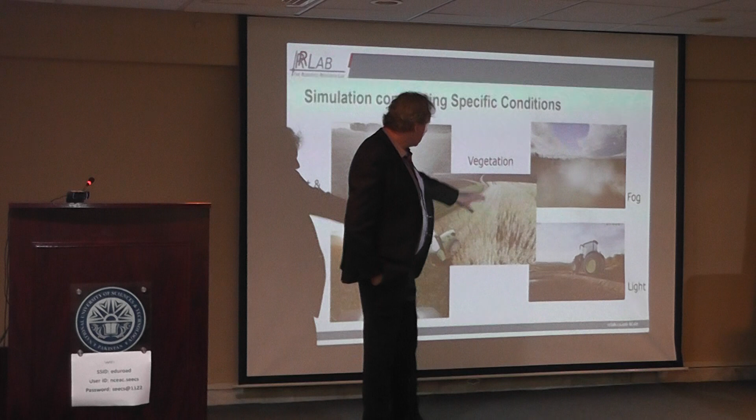And we can simulate this now. This is the nice thing. So we can say, look, what happened in the tractor? It's not moving, while the sun rises in the morning, runs around and goes down again. And you can now simulate it and find out what is really, at the end, the result of whatever you want to do in the classification process.

And we have made a remarkable test with one YOLO version. We have a camera in the best position looking ahead, and we have 4 simulated persons on the field. And we make just this test. The sun goes around, so we simulate 1,000 or even more images. And we take a standard YOLO, which is not so bad, to classify persons. And now we said count the persons in every one of these images.

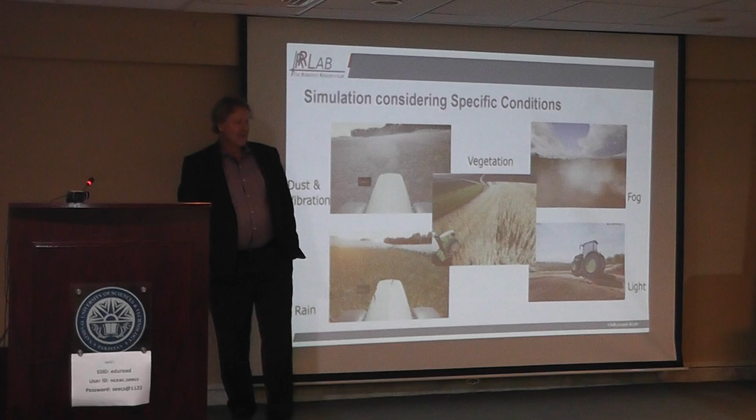What do you think came out? 4 persons were standing there in the best position. Also from some perspectives you get better results than from others, so this was all perfect. Only 50% of the time we count 4 people. We count sometimes 5 people, which also was strange. And then 2, 3, whatever. 1 also, and this comes of course based on the shadow effect. You merge this and the classifier cannot deliver what it has to do.

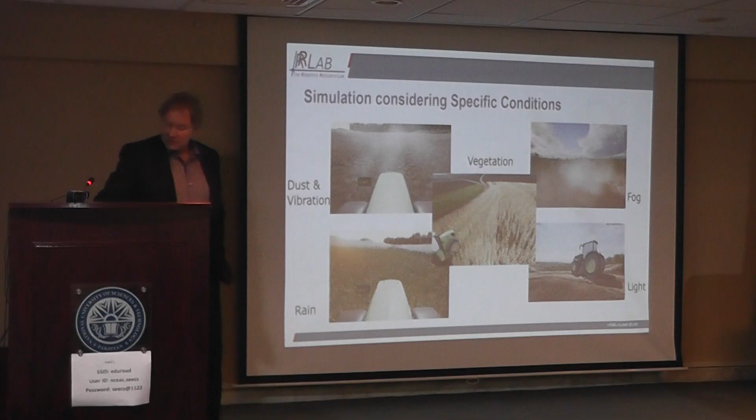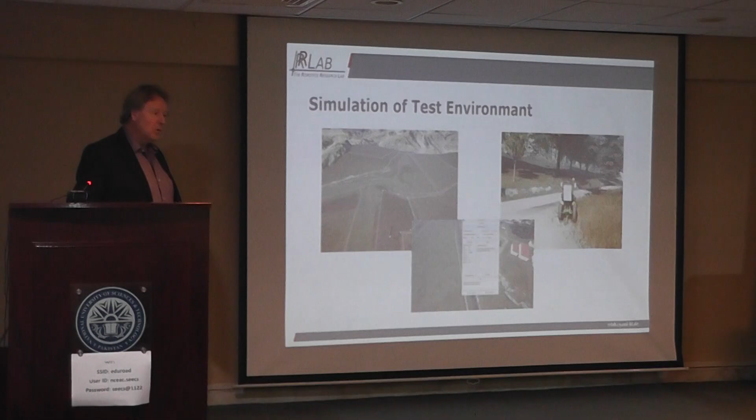So this is what we now can test. It's hard to test on a real system. How long will you go out and check your system? This is impossible. What we also use the simulation for, in an intensive way, is where to place the sensor system. This is a very hard task, because if you have a static situation, it's simple. You can place it at this angle, the camera looks down, the laser scanner should scan this, fine.

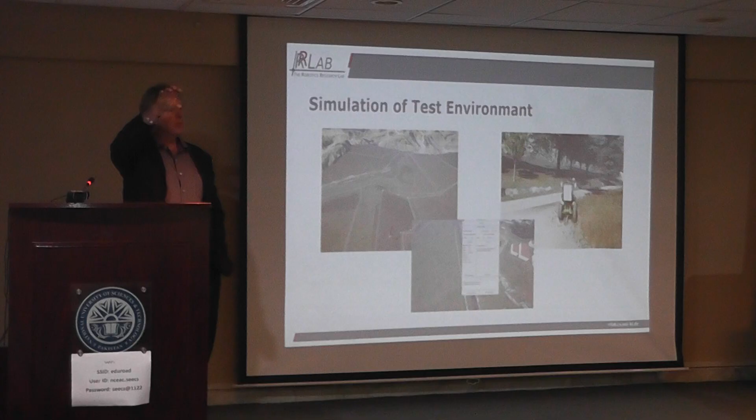But what happens if the machine is moving? And if you have rough terrain, we also have applications where the machine is really doing this, then you suddenly find out it looks to the sky, and the result we like to have is not coming. But to predict this is impossible for you. And this is helping: if we have it in the simulation, we can go over it and observe what measurement we get. And we can also find out if there is something relevant that we do not see in a specific situation, based on the position of the sensor. This is also what we now can do.

We have developed a Finroc middleware. It's similar to ROS2, for those who know this a little bit, which supports more or less that you see whatever information is going from module to module. You have a lot of interfaces to sensors, you have the drivers and all these things. You have a nice interface where you can show every camera image and whatever. If you like to use it, you have a widget, you open it and you connect it in a graphical way and you see more or less the results for testing.

This is perfect. Then for the control software, we have this reaction architecture. And the reaction architecture is more or less described here. It has the typical control structure that we have on nearly every robot. We normally have three parts. This is one on one side. You can group together the information that you get over the sensor system and the knowledge that we put into the system, the knowledge-based system.

Then of course you have user interfaces, and you have the control part, the red part here, which really controls the machine. The control in mobile robots is normally a three-layered hierarchical control, which we have also implemented here in the system with navigator, pilot, and low-level control loops. This is more or less what we do.

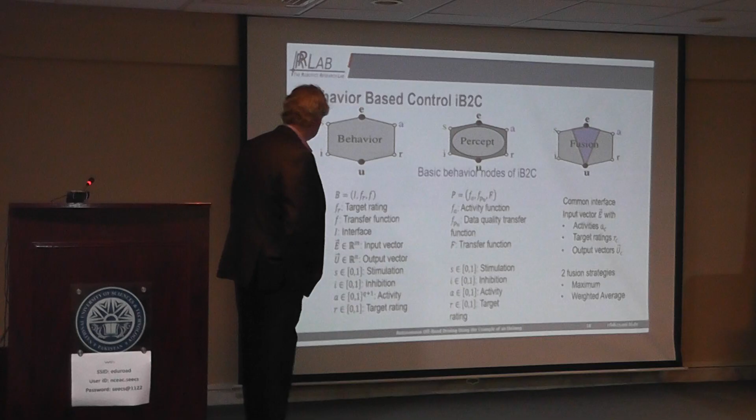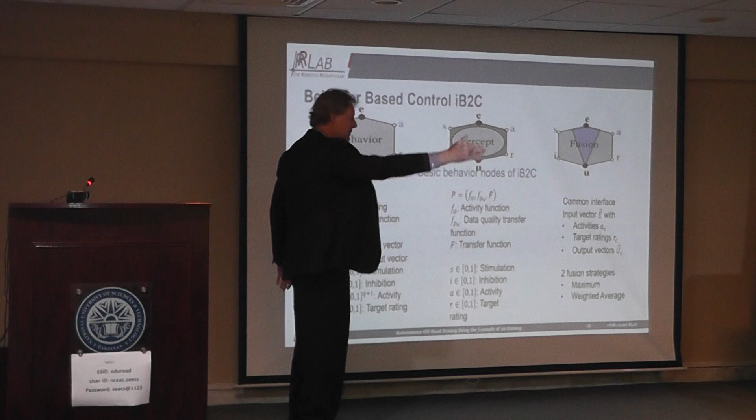So, I skipped this maybe a little bit, the reaction part. I'm not totally out of time. This is more or less how we describe our control concept, or also the perception concept. We have three main nodes. This is the behavior node, which is used for whatever you do as control. For example, you make a simple collision avoidance: you measure at a specific distance, at a specific angle, an object that you like to drive around.

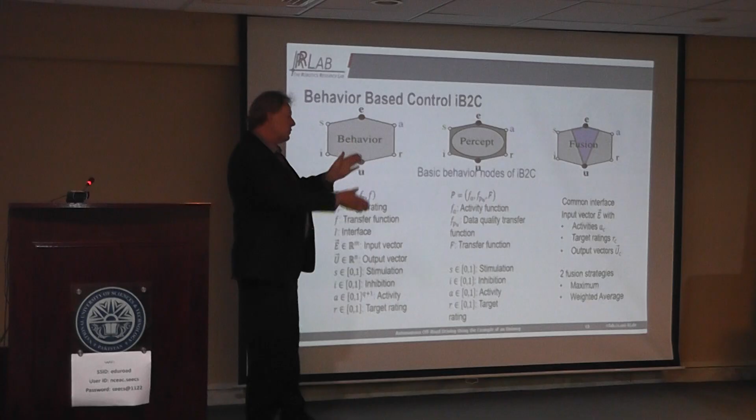So this could be one of such behaviors where you say, if this is more on the right-hand side, we drive a little bit to the left side, because we have the angle between the object and the goal where we like to go. This is normally straight ahead. And so we can make very simple reactive behaviors, which are active only if it's a critical situation.

If the object is 5 meters away, this will not be active. It's only active if it has to say something. So these are the behaviors. They are structured in a hierarchical way, so we can also go to a social level, use also for behavior-based control of our humanoids.

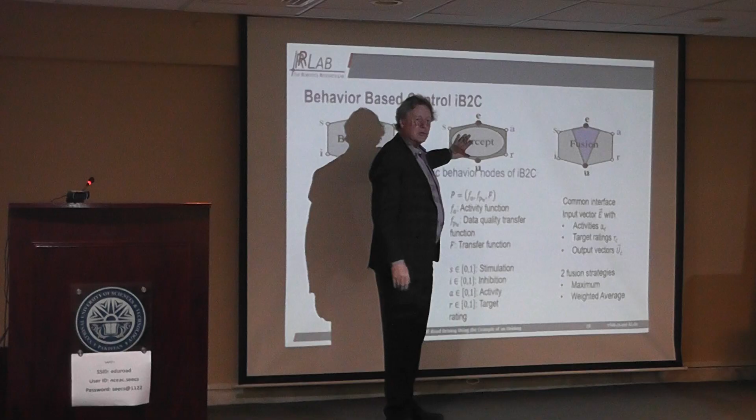Perception is the same, it's also a behavior node. Here we do a lot of things in the perception of the environment. Perception is only one thing what we add, because we start from the sensor system. What is a nice measurement? And it starts from the quality of the basic measurements of the sensor. So you have an imprecision.

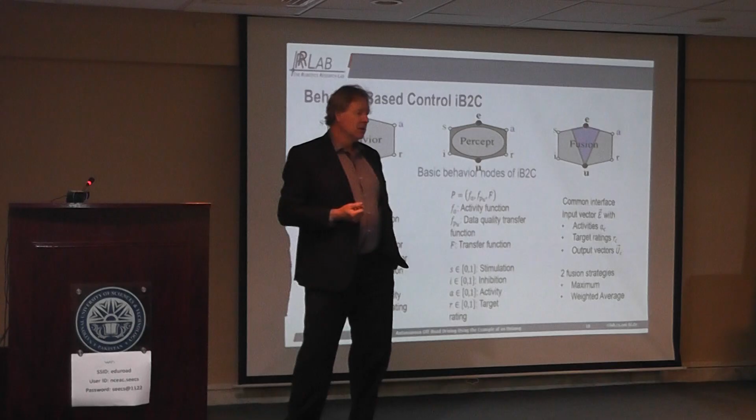For example, take a stereo camera system. So we know if we go in a far distance, the precision goes tremendously down. This is more or less the principle. Depends, of course, on the parameters, how far the cameras are away from each other, the stereo base, the focal length, and so on, what you have in the cameras. But in principle, you have this. This is not the case if you use a laser scanner.

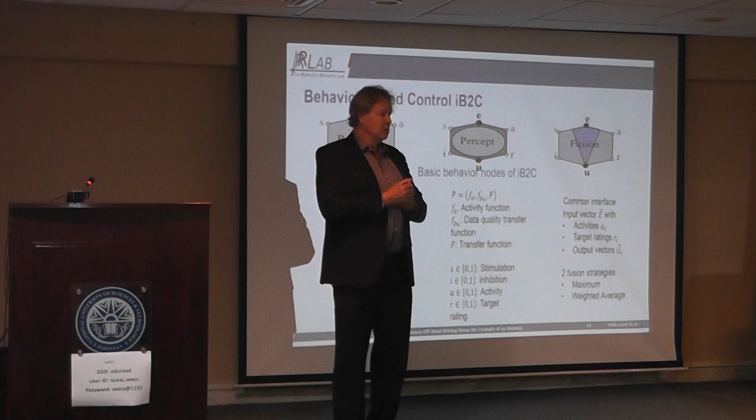Totally different. So, but now the question is, if you now need a distance image, whatever you like to control, how can we trust this data? Now we have a problem. This trustness depends not only on the principal physical skills of a sensor, it depends also on the task.

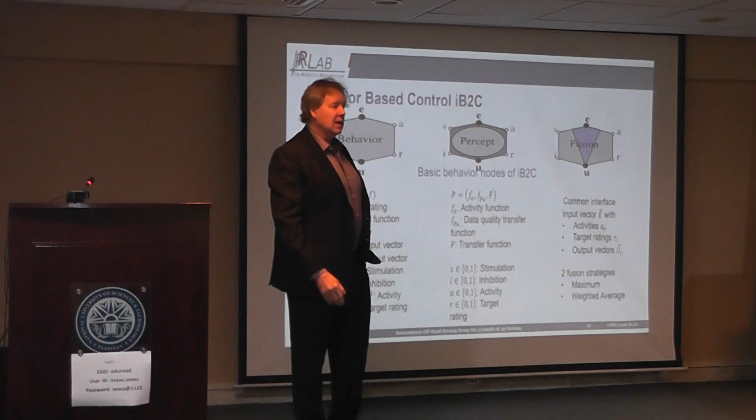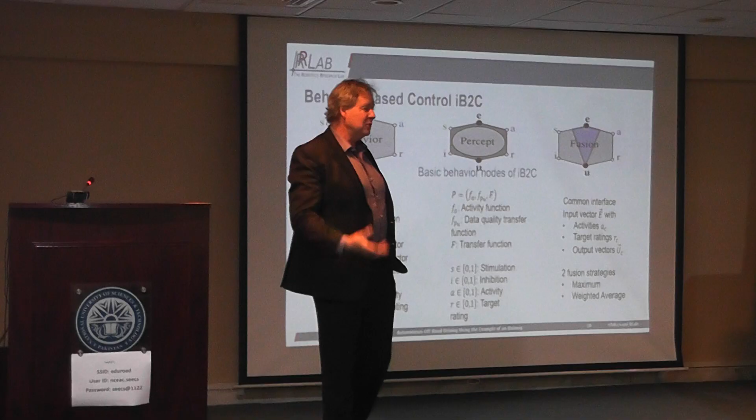Which means, if I, for example, drive around, say in 20 meters, I should go roughly to another pathway, and I have a lot of space, even if my stereo system is 5 meters imprecise, I have no problem. Because I first of all go roughly in the direction, later on the precision gets better, so we go better and better. At the end we have only a few centimeter precision to the place we like to reach. So in this case it's not relevant.

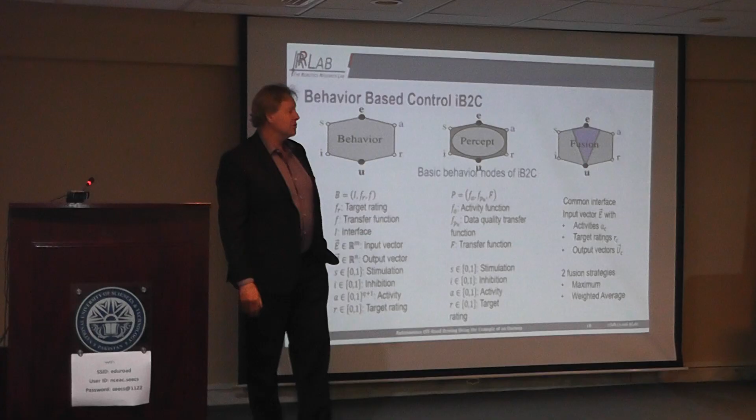If it's really relevant, say you have a car, you drive on the highway with 200 kilometers and the truck is here, and you have an imprecision of 100 meters or 20 meters, well, you get a big problem. So it depends a little bit on the task what you have, how you interpret the confidence of the sensor measure. And this is what we code here also in this perception.

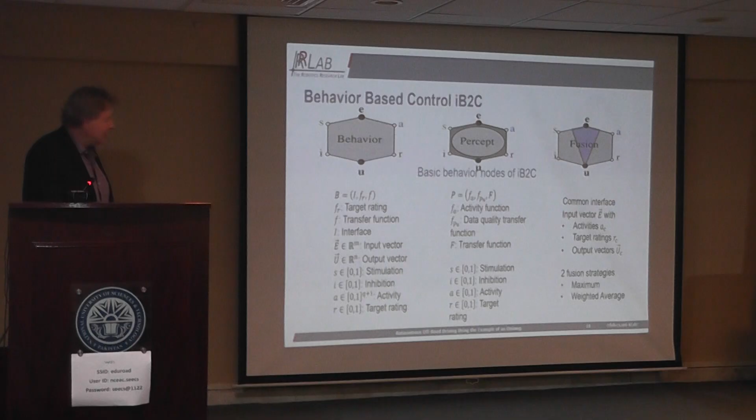And we can calculate a relative error which considers this task dimension, not only that a sensor has a specific imprecision. And then, of course, because we like to have a big network, we have to have fusion nodes. And the fusion nodes, in our case, are average fusion and maximum fusion. Maximum fusion is with the activity.

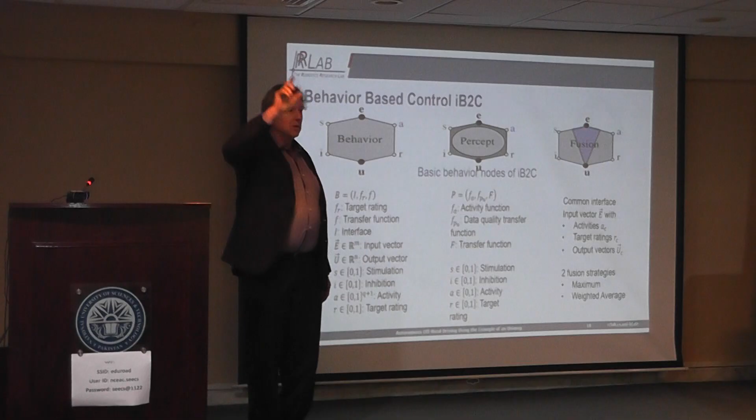So the highest activity says in a behavior, I'm responsible now for whatever we like to do. This is shown by the activity. And based on this activity, if I have a winner-takes-all fusion, a maximum fusion, the highest activity is selected. The task done by the machine is done by the highest activity. So we select then a specific behavior.

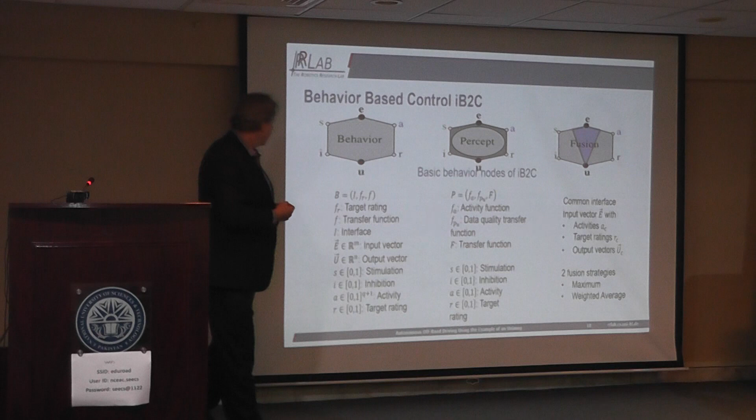We can also do average fusion, which is nice, for example, if you have the following situation: think about you have a lot of sensors around your vehicle, a simple sensor, like an infrared sensor, only one beam goes out, but you have 20 of these around the vehicle. And now you should say, in a complex scenario, what is your way to navigate? And this is nearly impossible. Try it, implement this. Then you find out, oh, for this situation it will not work.

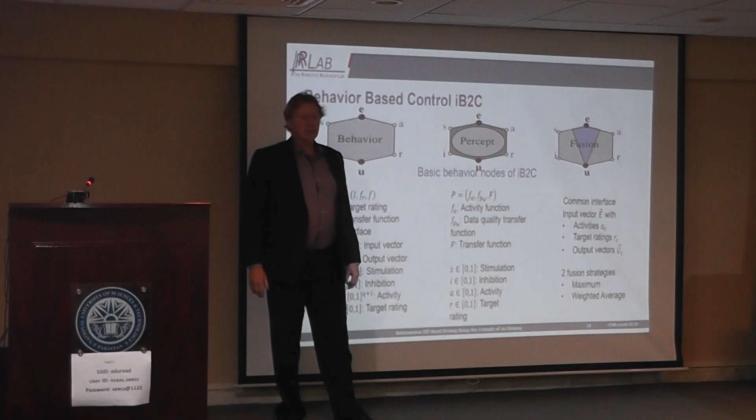So you can do it also the other way around, and this is where average fusion helps tremendously. You can say, I make regions around the vehicle, separate from everything you measured in another region. If in this region something is measured in the close range, I have a specific reaction. And I do it with all other regions, and now the average fusion is coming, which means whatever output is coming, for example, for the steering angle of our Ackermann-steered vehicle, we fuse this together, and the fusion is at the end the control result. So this is what comes out, and at the end you get such networks.

We have systems where we have more than 600 behavior nodes inside. We have never defined what is in a behavior node. You can copy a full kinematic model, dynamic model inside. You can, if you have a perception node, also copy a full neural network inside. You can have very powerful nodes.

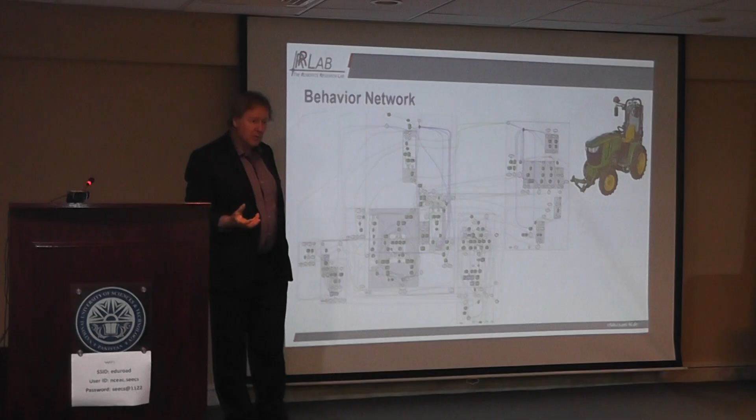It's better to have simple nodes. This is better from the concept, because you have an implicit redundancy. But you see roughly what comes out. I will not go into detail on what is described here. From the functionality, if you drive, I select only this. Path planning, path detection is of course extremely relevant.

we are also on pathways through forest. If you cross from one part of the field to the next one, you have a pathway which is also hard to detect because everything is green. This is also typically what you find on fields, which you also have to somehow detect. So let's come to the end, more or less.

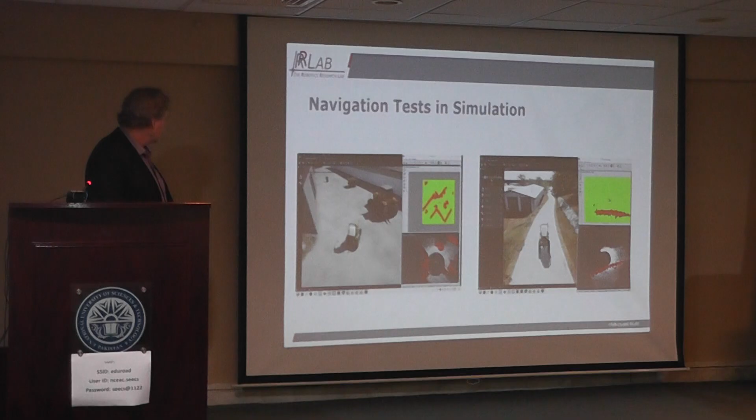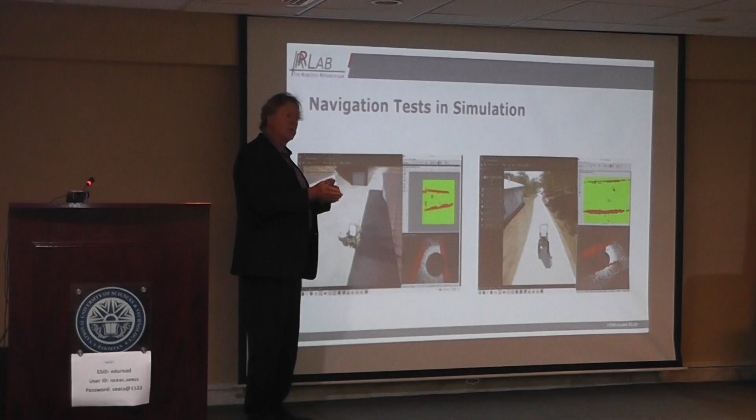And now you can observe under specific conditions what your collision avoidance controller, path following controller is doing, and if it's okay, if it goes too close. These are typical parameters inside. Sometimes your trajectory goes too close, and then you get problems if, for example, you have a disturbance in the sensor measurement. This could lead to a critical situation. You see here in this situation you have enough space, you don't have to do this.

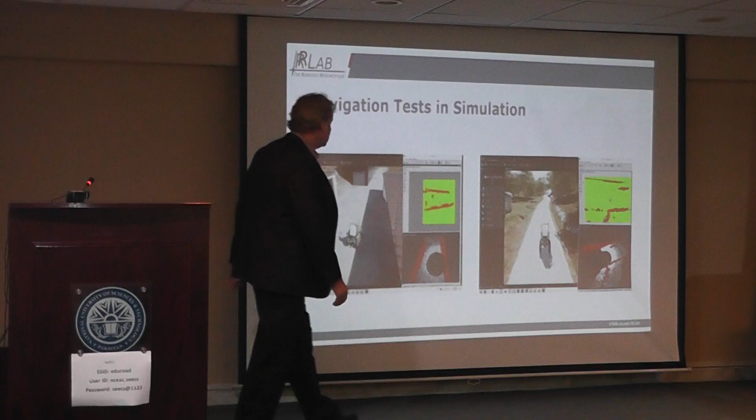And on the other hand, these are the typical transport operations from the farm to the field. This is a hilly environment, and you normally have to go up the hill, and on the top of the hill you have the fields. That's why such a behavior is of course extremely relevant.

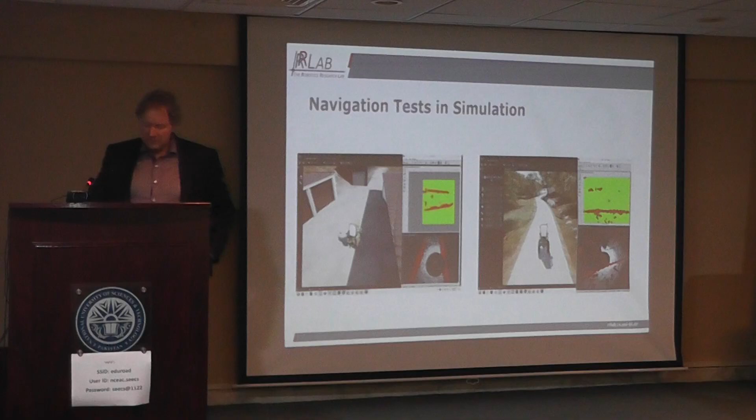And now see also the real machine. This was behind our lab. So we have a very small vineyard, and now we can test specific things. We drive to specific points and so on. So here we make tests, and we do a bigger test next week. We'd like to go to the Neumühle, one step ahead, where we drive.

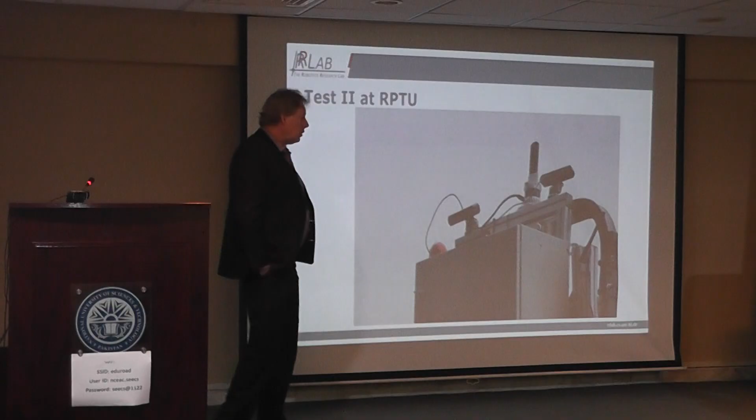This is also on our campus, from a specific hall to this small vineyard, in a mainly autonomous way. We control by hand over the street, because if something goes wrong, we have a big problem. But on this other pathway, it goes. See how the tractor now is navigating. These are parking sites around our lab. It crosses.

This is the official street. In Germany, it is not allowed, even with a test machine, to drive on it. This is the principal problem. Of course, we do it, but by law this is not allowed. They catch us. This is the parking area of the university. Here it's not so critical. It's a private area, or half private we call it.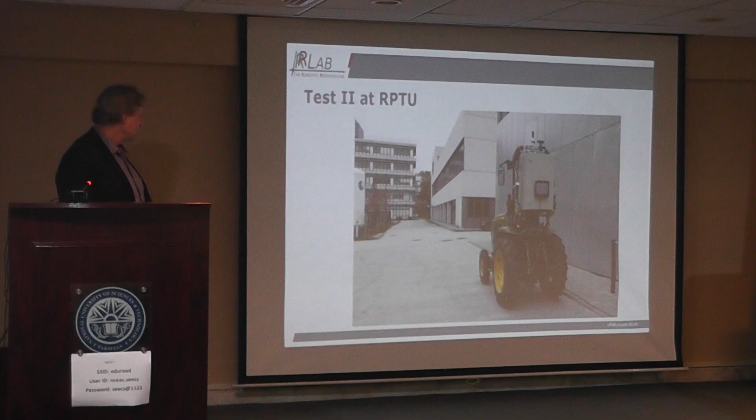If something happens, we also get a problem. But this is normally very safe. This is also robust. If someone jumps ahead, it will directly stop. And with this speed, not much can really happen. We go maximum 10 kilometers per hour. In the normal test, this is around 5 kilometers per hour, something like this.

And then the brake distance, if an emergency stop is coming, is some centimeters. This is real, so I would say 40 centimeters, something like this. So a direct stop. This is the advantage that we have. Okay, this brings me to the end. These were more or less the results I introduced.

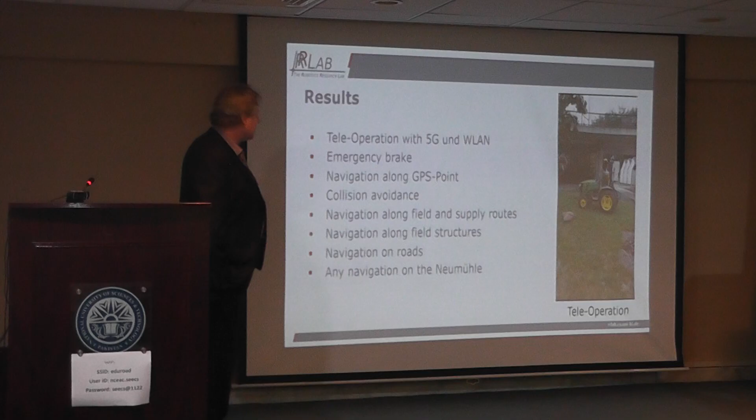We have to add a lot of things we have implemented for other machines, and also define a few new things. But we hope that we make sure that we can do typical operations on the Neumühle, on this farm, in an autonomous way. So this is what we think in a short period of time we can show also in fields.

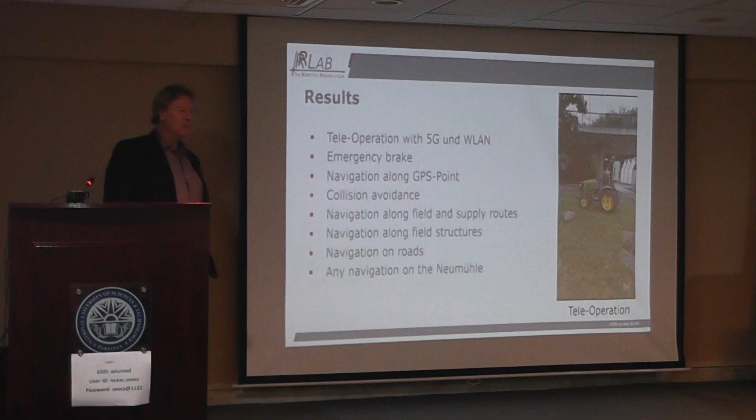Okay. Before anyone asks, I want to know something. What do you think about introducing crowdsourced data into these simulations? I see, especially on Steam, people already have farm simulators which are very popular, and there are lots of gamers around the world who play this. Why don't you release the same thing for the general population? Once they play, you get some kind of decision making from them. Then you apply some kind of things on it.

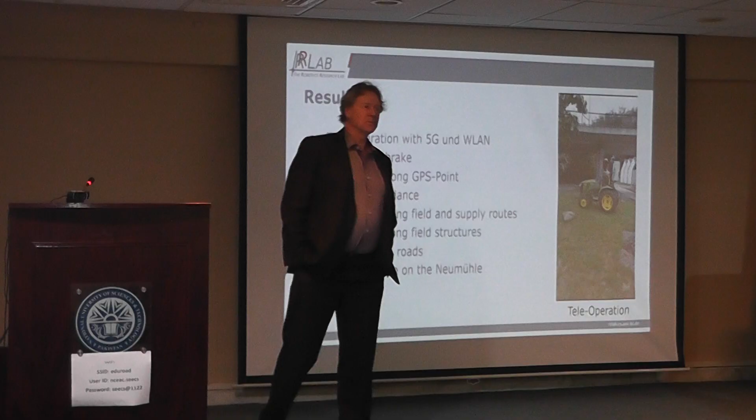We also know this nice farm simulator, and we also checked it. What you have to implement, and that's why you have to have an open system, is the possibility to extend your system, for example with the sensor system. You have no sensor system in these games. And even if they have a standard sensor system, look at CARLA. I don't know if this is known.

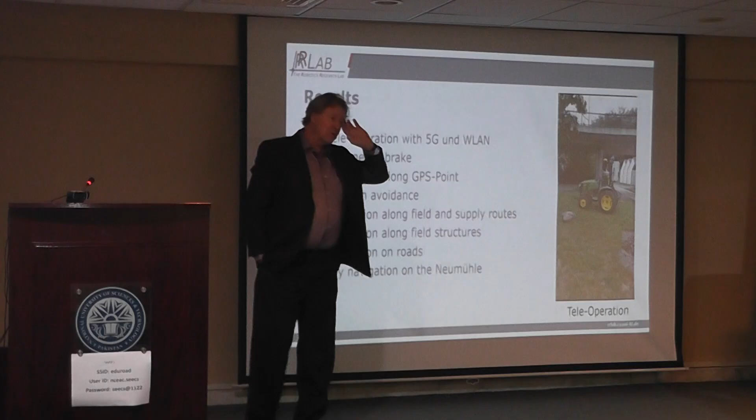This is for cars. They also use Unreal Engine and add a layer on it, and they have it only for streets and whatever. Even there, they have simulated the sensor system more or less very badly. We have compared it to what we have done, and you see differences. Because what is inside Unreal, without too many technical details, is a simple Z-buffer. The Z-buffer gives you distance information to the object, but it says nothing if something is in between. Which means you have to have a ray tracing concept if you really want to understand what your sensor is measuring.

And then it gets harder. The nice thing we have is that we can now implement in this engine the physical properties of such a sensor. Of course, it's not one-to-one, this is impossible, but you can go much closer to the real sensor measurement. And this is, of course, not existent in the games, and even in the tools there are a lot of problems with the sensors. And of course, we like to be flexible. If you have a tool, you are not flexible, you have what you have.

But we really like, also for application and construction, to say, this is our place where we want to do something specific, let's go measure this and bring it to the simulation. And this is the next thing you can't do with standard tools. You must have control over all these things, otherwise you will fail. It's too far away from you. It looks good, definitely. We have also checked this. It's really good, it's nice. But for example, shadow effects are not as perfect as here; they calculate much better. Of course, these games are also based on these tools. But it's clear how you should do it.

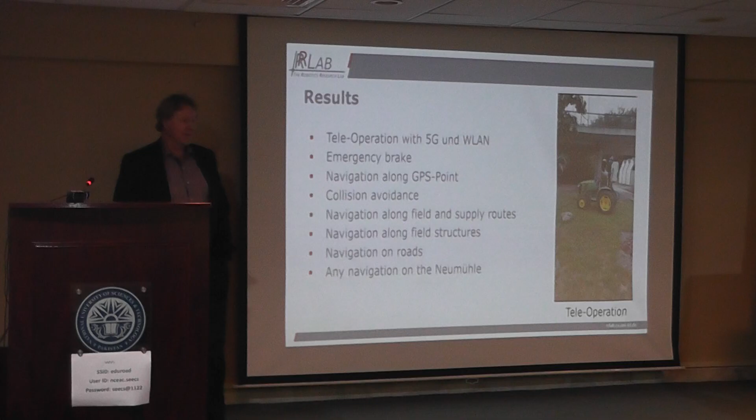I was just curious: the simulation software your group is using has obviously matured over the years. So what were the development steps like 15 years ago, when these simulation softwares were not so realistic? Yeah, so we started when I was in Karlsruhe; we built the first simple simulator, I remember, in the 90s. And this was only lines and such things. This was the maximum that was possible. And what you see in this tool, you can see as a video.

And of course, it's not only from the conceptual point of view; a lot of things are now getting better and better. It's the computing power, which we never had in the past. Now we have enough computing power, well, we never have enough computing power, but enough to make these very nice simulations. There are also Unreal videos on the internet where you can really compare. I have done it with students: I show an Unreal video and a real video.

There's a nice one from a forest. And I said, is this a real video? Is this a simulated one? And they do not know. This is directly coming out. If I said some is simulated, then they guess. But you really do not see it anymore. But you must be careful. This is not what we need.

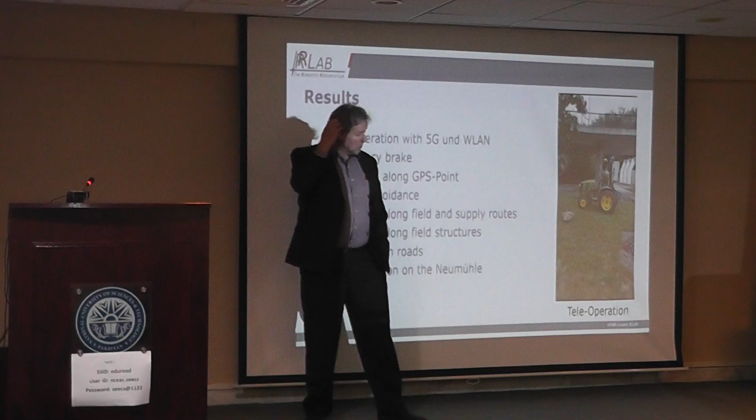So we have also now started with these more physical tools where they calculate roughly the dynamics. So for example, that you have mass distribution. And if, for example, you have a car and the motor is in front, the mass distribution is more in the front. And if you jump, it falls in this way down. And if it's in the back side, it falls in this way down. And this is of course important later on if you like to use it as a testing one. And of course here they have to add more and more and more.

And now again we have computing problems. Now we are on the limit. Batteries are such things. Even if it would be nice, there are tools, but they calculate hours to give a result. That you said, okay, what is more or less the behavior of the axle? What forces now can be measured in the simulated axle? But then we are far away from what we are doing because for simple movement it takes hours to calculate this. And we like to go, of course, closer to this movement. But it's a long way, but we have now reached a situation, what I have never seen in my life, that we get so realistic this machine simulated. It was never before.

First of all, thank you, Professor, for your insights. And I want to have some look on smart farming 4.0. Is that related to industry 4.0 and 5.0? And second question would be related to your product, because I am a son of a farmer and I have an experience of using a tractor. I see your product is more on checks and brakes, which is more sensitive. It would rather limit its performance in terms of plowing and field work. If it would be to the industry level or factory level, then how would you incorporate that performance limitation in your product?

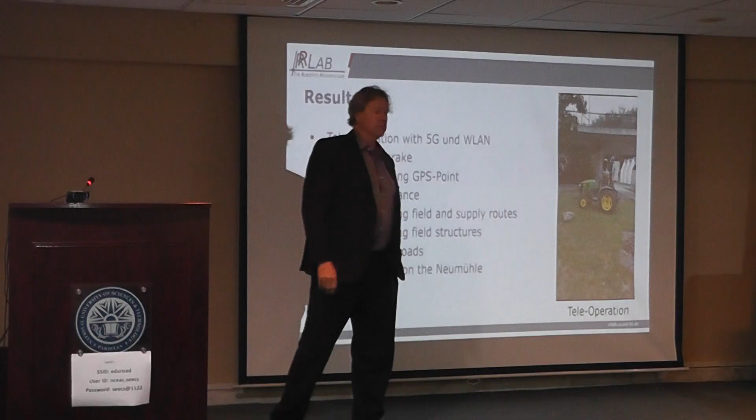You are right, this is what John Deere is doing. You can buy a lot of big tractors. You have, for example, follow pathway with GPS, very, very precise. They have a precision of 1 to 2 centimeters if you have enough satellites. Otherwise, it's a lie. But they can do a lot of the standard operations on the farm, but they have to guarantee there's a person sitting there. If you like to get rid of the person, you have to implement in a totally different way. And we are not interested in assistance systems. We directly jump on autonomous systems. So we have not the problem that someone is doing something.

If you have it, you have to look strongly at the interfaces. How does this look? It's also not a simple task, because you need a little bit of time to take over the control again. So normally you calculate up to 20 seconds in cars, they measure it, to analyze the scenario around the car. Think about, you read the newspaper and now the red button is coming, you should take over the control. Then they measure about 20 seconds, which is a long time to calculate how long you can drive in this period. Of course, you can make a reaction where you see a next object directly next to you faster, but to analyze the scenario to make a nice decision takes longer. And this is also a hard problem, but we are not interested.

And about my first question, smart farming, do you have examples? Yeah, all these things go more or less into this smart farming. What's happening at the moment, because we are strongly together with John Deere, so we know a little bit what they are doing and trying to implement for the next years.

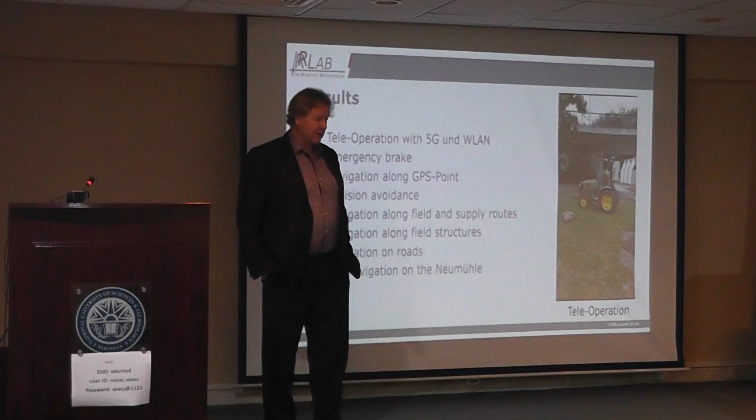What the idea of all these companies is, they like to give you services. So the way that they sell a tractor, this is what you can forget in the future. They sell services. And the services are maybe related to a tractor, to an implement on the tractor, to a specific task, to a specific environment. And now the cloud things come. They have all cloud services. And of course you should also pay for it. You download the services to a platform which knows what to do with the services.

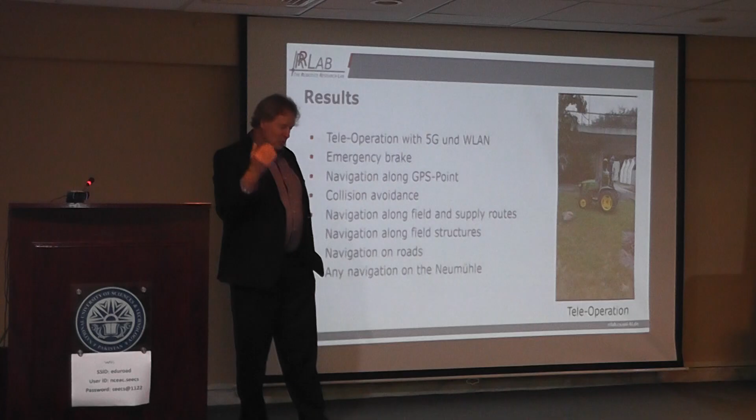And then you get this task. Of course, at the moment, as I said, you as a farmer have to drive with this vehicle and make swaps or whatever. This is not what they like to automate now. This is by law a big problem. But they really like to sell services.

And it's also not only the tractor, also these digital systems around, these databases, these knowledge bases, all this is what they like to combine with each other, so that you, at the end, as a farmer... this is also only for big farms, not for small ones, forget it. All these tools you cannot use for small farms. But for big farms, maybe you can reduce the man effort tremendously with such tools.

What is the basic goal in this? We see the navigation and so on. Is there any digging bucket or a blower that should be attached with this? At the moment we have no implement. We ordered a cheap one, which is not so expensive. On the front, this is a mowing unit. Mowing? Yeah. But as I said, there are infinite implements which you can buy.

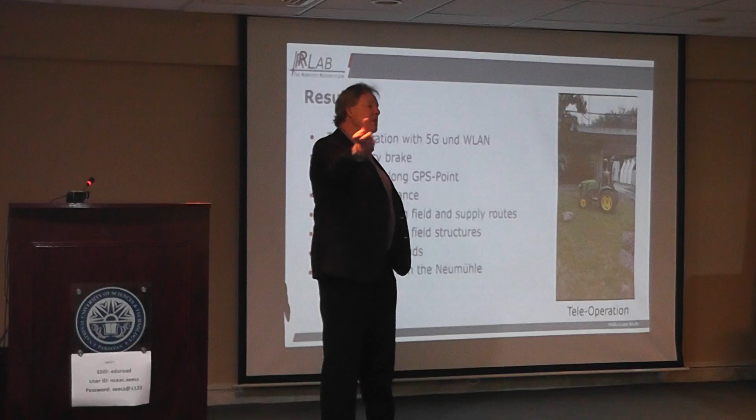And of course, we have another idea, but it's just too long. If the application is, for example, mowing, then the navigation should be a bit different, it has to be adapted. Yeah, you're right. And then also the mowing unit has to be adapted. Exactly. And how do they do it today? They have a nice standard bus system, where the guys who build the implements, who are normally not the tractor companies, and the tractor companies can communicate with each other with ISOBUS.

This needs a big effort, because the tractor has to know, if I'm over here at the plant, that the mowing unit is maybe 3 meters ahead, so you have to somehow calculate what must be my behavior so that I will not also mow the nice flowers or whatever. So this is not simple. So what we also try in another internal PhD project is to separate.

So you have an intelligent implement and an intelligent tractor or whatever machine, and there's nearly no communication between each other. They both know the task. That's all. This is the same if you think about people. Say you have one person sitting on the tractor and another person who controls this mowing unit. And it works. Quite sure it works.

And they don't have to communicate with each other, because maybe the mowing unit says, oh, now the tractor or my unit goes over the flowers, so I lift this mowing unit. I don't know what the tractor is doing, I cannot influence it, but I can lift and then we have no damage. And a similar thing is what the tractor driver can do. And we also like to test this, so that we really have a distributed system.